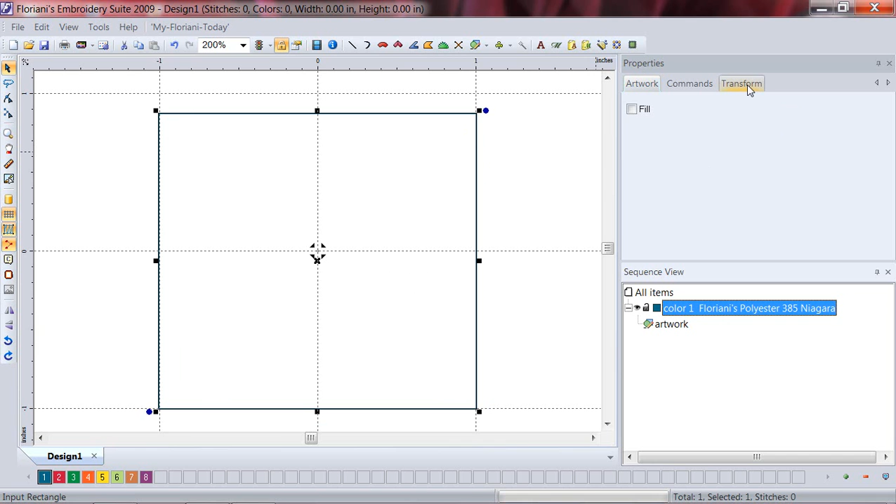Now I'm going to select this box. I can either left mouse click on color number 1 here - notice it has put selection handles all around my box. With that done, I'll come up to my properties. Now that I've selected it, it's added a transform tab. We're going to left mouse click on transform.

I'm going to come down here and deselect maintain aspect ratio, and then change the width to 5 inches and the height to 5 inches.

Now in today's exercise, the block we're creating is a block of fabric - we're going to do faux knitting, created with yarns. Your block size is only determined by the hoop size you own. So if you want to do a block of fabric that is 7 inches wide and 12 inches long, because your hoop will accommodate that, you can certainly do that. But for this exercise, we're going to work with a 5 by 5 inch block. It's something we can get through quickly in class, and those with smaller hoops will be accommodated as well.

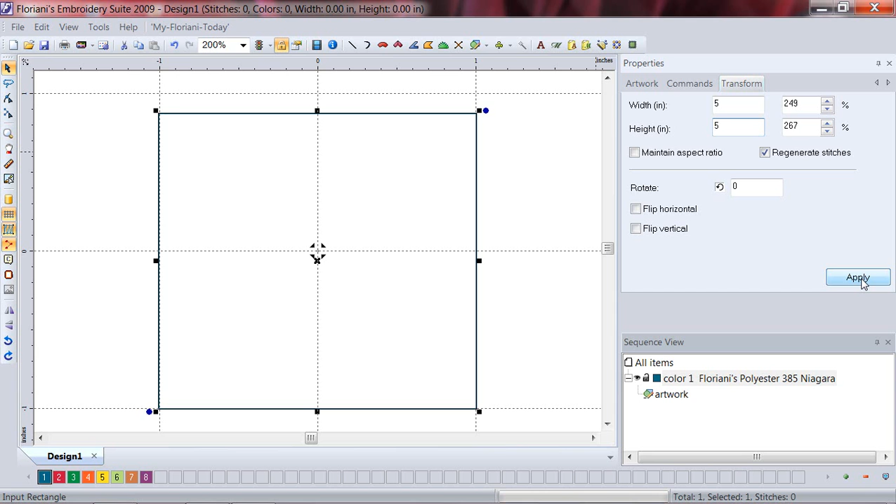So we are going to apply that. I'm going to come up to my zoom box on the top toolbar, left mouse click on the down arrow, and tell this to fit to screen. So you can see I have a 5 by 5 inch block here, and that is what we just created.

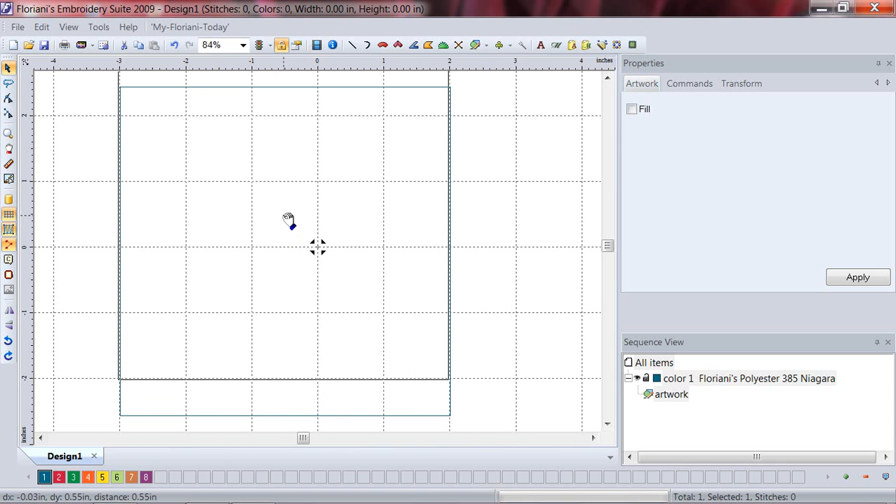Now, with this still selected, I want to move this box so that it actually lines up on grid lines, and you'll see why in just a moment. By holding down my control key and using my arrow keys on my keyboard, I can scoot this box over, and I can be very, very accurate because it's moving in small increments. I could also, of course, drag the box anywhere I wanted by holding down my left mouse key and holding onto this X in the middle.

I can move that box around. The reason I want to have it on grid lines is because we are going to use these lines to create our project. Now to do faux knitting, this is a Jenny Haskins new technique that I have seen at several of the shows.

They do it by sewing these grids on their sewing machines. I thought how nice if we could have it embroidered. It would take much less time and it would be more accurate.

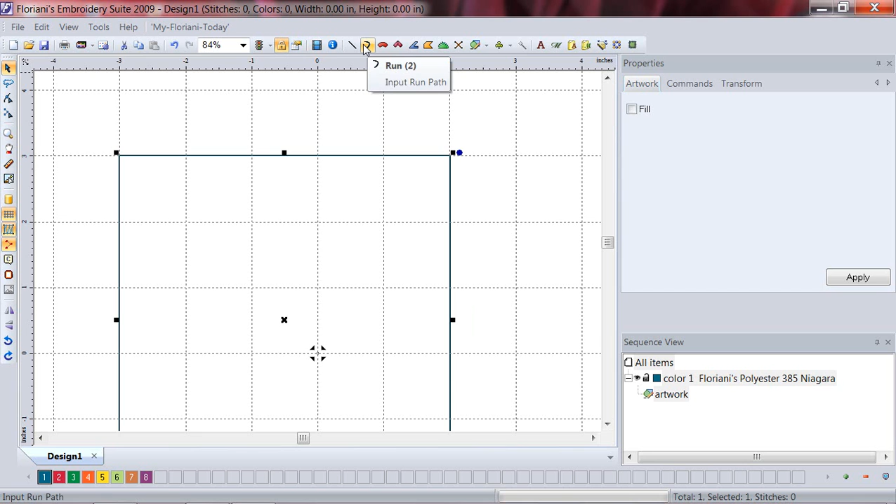So the first thing we're going to do here is grab your run tool. That is the little backwards black C on the top toolbar. Left mouse click on it, and notice the minute I select it, in my properties box everything came up. The first thing I want to do is change my stitch length to 3.5.

I am going to select a bean stitch, which is a triple stitch. And we will left mouse click on the word apply.

Now, depending upon the resolution on your computer screen, if you cannot see this apply button, chances are your sequence view box is above it, like that. So you'll come and put your mouse here until you see it turn into two parallel lines with arrows on it. Hold down your left mouse key, and while holding it down, drag your sequence view down a little bit so you can see your apply button and left mouse click on it.

Now with that applied, we are going to start our grid to hold down our yarn. So left mouse click on the upper left hand corner of your box, right on top of that blue line. Left mouse click, and it has put a stitch in.

Do you notice that? And the nice thing is since we put snap to grid, you notice even though I'm kind of moving my cursor up and down, it's hanging on to that line like grim death, because it's not going to allow me to go anywhere that doesn't snap on to the grid.

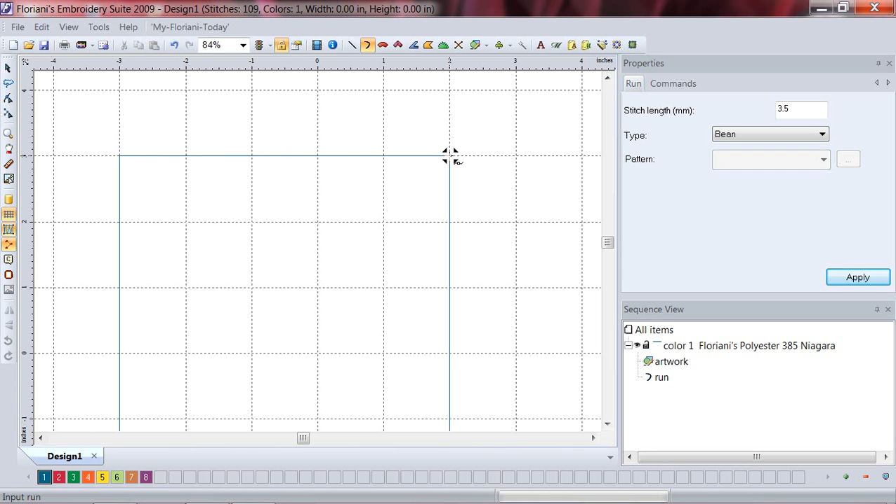Now if you go up to your top left hand tool on your left hand toolbar, that's your select tool. I want you to notice it highlighted it. I want you to look in your sequence view as well. Now we are using the same color at this point, R385 Niagara, if you have the Floriani thread palette checked.

The first thing I did was draw a piece of artwork. The next thing I did was create a run stitch. Now I want to change this run stitch to a different color.

We're going to come down to our color bar, and left mouse click on color number 2, then right mouse click on color number 2. Now you notice I have a blue square that's artwork, and I have a red line that is a run stitch. Now we've created that.

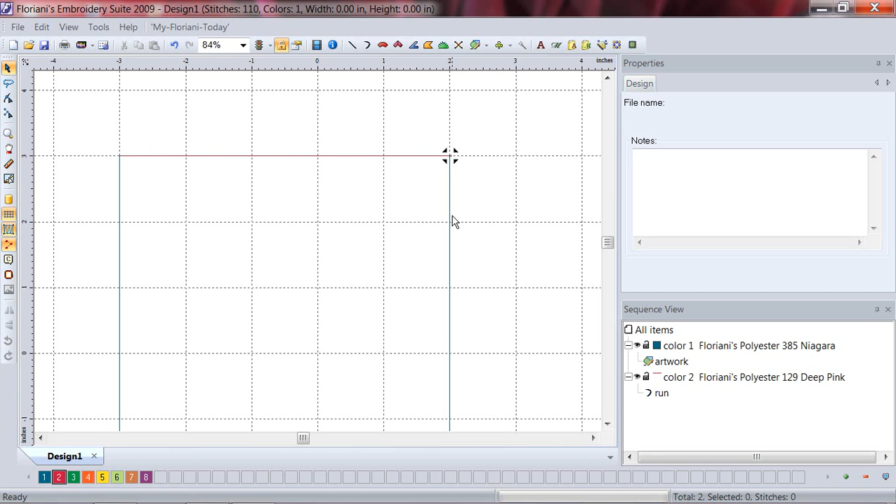So with the red, reselect the red so it will stay on our cursor now, and we're right mouse clicking on it. We ended our last line right here. We want to come straight down to start our next line with our run stitch.

Make sure your run stitch is selected. You're going to left mouse click here, and why we're doing it this way is think of how your machine is going to path this. We're going to go left to right. I don't want a huge jump stitch coming clear across and going back to the left again.

So I'm going to start this line on the right hand side. We're going to go clear across, and again at the end of the box we're going to left mouse click again. Now I have the two stitch ends. I will right mouse click.

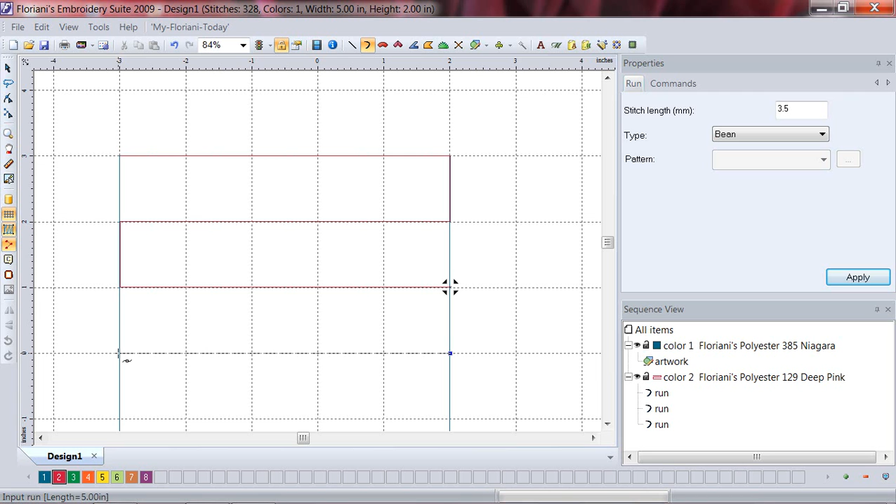Now I'm going to come straight down, left mouse click, come across, left mouse click, and right mouse click to create the line. Left mouse clicking puts in the points. Right mouse click enters the commands to create the line.

Right mouse click, and again we're just following our square down. Right mouse click, left mouse click here, come across, left mouse click at the end, and right mouse click. Now let me make sure I'm fit to screen so I can see all this.

You know where you ended, if you had to take a break or something, you can see that the cursor is at the last place you ended right here. So I'm going to left mouse click, and right mouse click. Now we are going to do our grid going vertically, and we're going to start right here where we ended.

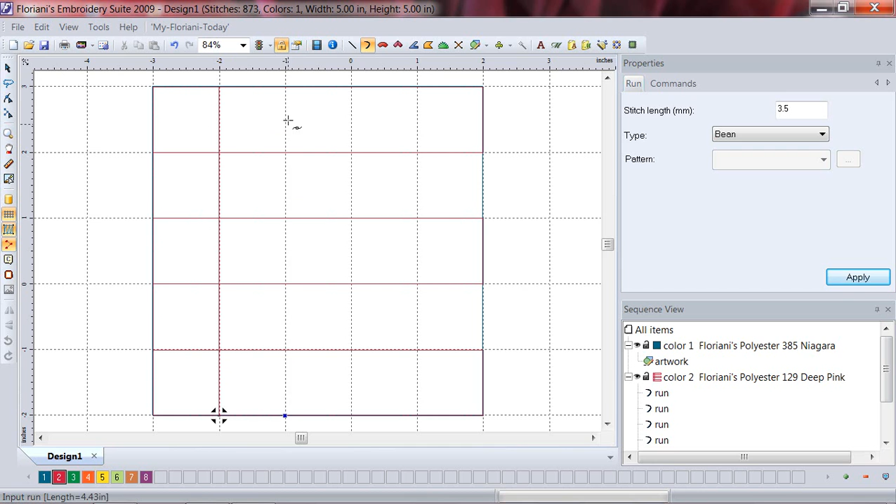We're going to left mouse click, come to the top, left mouse click, and right mouse click. Come over to the next line. Left, left, right, left, left, right, left mouse click, and right mouse click. I want you to left mouse click, right mouse click, and do not forget to do the last one. Left, left, and right. Now we have created our grid and we no longer need our placeholder, our blue box.

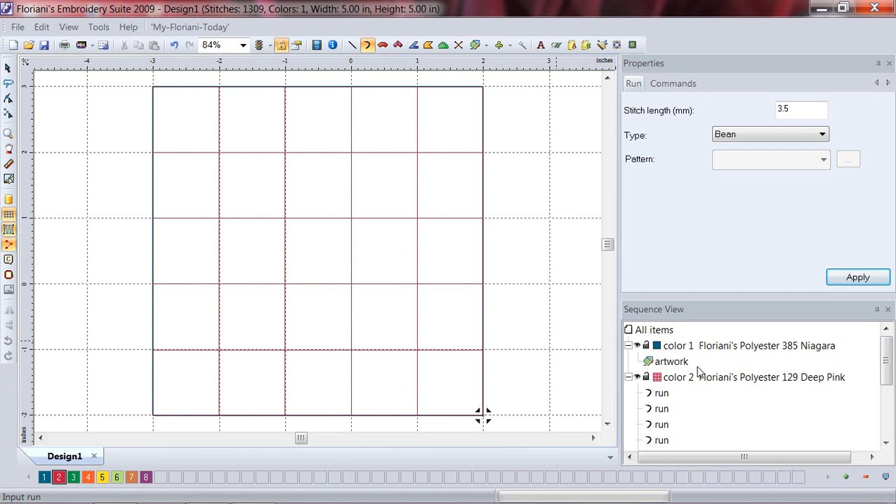So come over into your sequence view, left mouse click on the blue box, and I want you to now hit delete on your keyboard. I want you to notice it's gone. Now all we have is our red triple stitch grid.

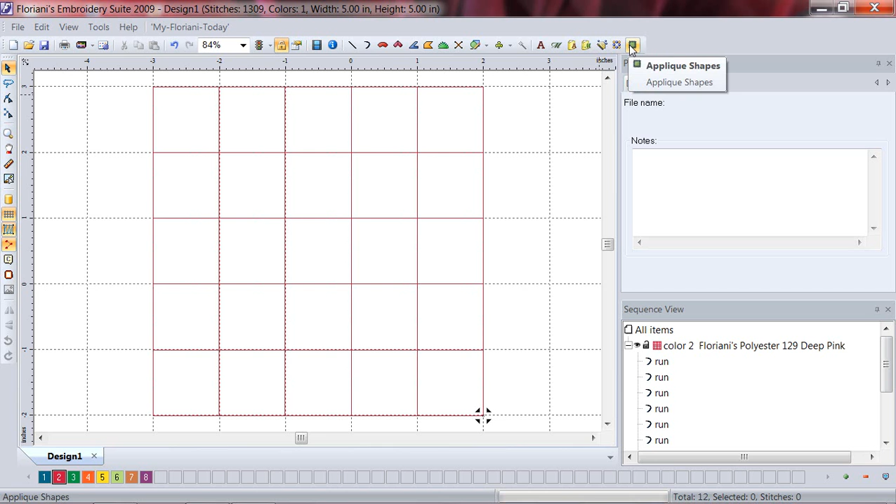Now we are doing, like I said, 5-inch squares of fabric. That's what we're going to create. Now we need to put something to also help hold the fabric together besides this grid system, so we are going to come into our motif shapes at the top right hand end of your toolbar. You've got, right before your applique shapes, right before that is motif shapes. I want you to left mouse click on that.

I want you to come down and select shape number 16. Left mouse click on it and it's going to automatically appear on our screen. Now I do not want it to have the motif running along it, so what I'm going to do is trick the software, because I want to use this shape as a run stitch, but it was actually created to be a motif stitch.

So with it selected, right mouse click on it, and you're going to see where it says convert to. Now notice it does not give me the run stitch option, it was created with a manual hand punching, so it does not give us the option of a run stitch. So we're going to trick it. We're going to come down, it gives us the manual stitch, but we don't want that. We want to actually define the exact length, all of our stitch lengths to be uniform.

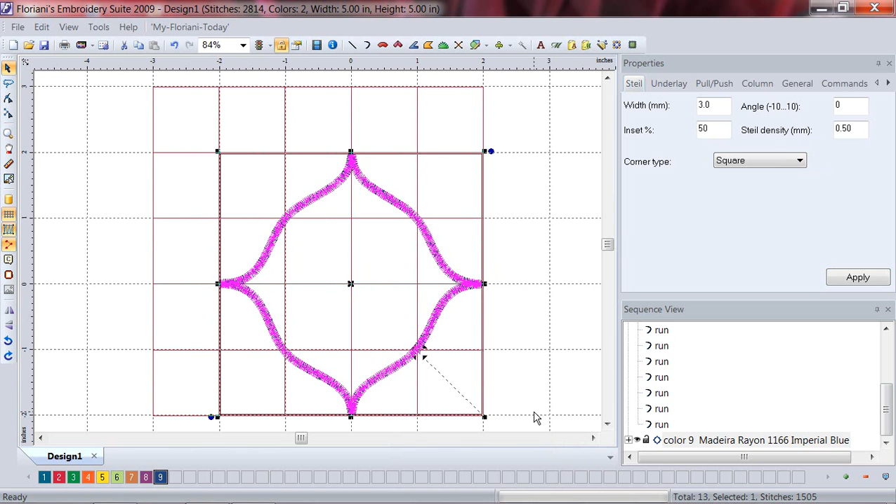So I want to come down to Steil. We're going to left mouse click on Steil, let it convert it to a Steil stitch. Now that it's no longer a motif, if I right mouse click on it, go to convert to, it gives me the option of a run stitch now, and that's what I want. So left mouse click on the word run.

Now I have a run stitch, and I've still got bean here selected and 3.5. I still want the stitch length to be 3.5, but I now want a 2-ply stitch. So left mouse click on 2-ply. Make sure you left mouse click on the word apply. So now I have applied that.

This is too large, so we're going to change the size of it. Come to the word transform, just like we did with our square. This time I want you to select maintain aspect ratio, because I want to just have to change one of these. I'm going to change the width to 1.5. We're still in inches, and you notice it changed the height accordingly, and we are going to apply that.

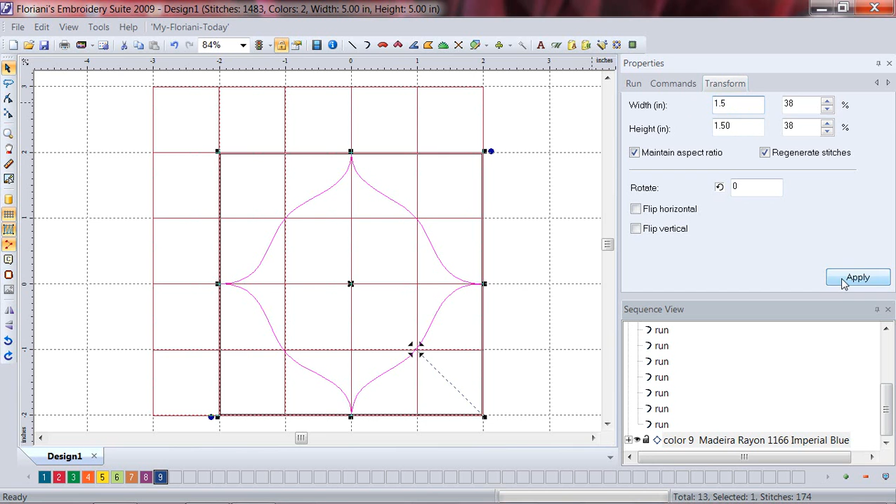With that applied, I want you to put your cursor on the center so it grabs the X, it turns into a little head. Hold down your left mouse key and just kind of bring it to the upper left hand corner.

Now we are going to sew several of these blocks together just like a quilt. And if you have seen Ginny's new book, Jenny Haskins, When Dreams Fly, that quilt, she's got a quilt, a coat pattern, several items in this book that are absolutely gorgeous. And you don't even notice until you look that the fabric was made out of yarn. It is absolutely stunning, so I recommend that book.

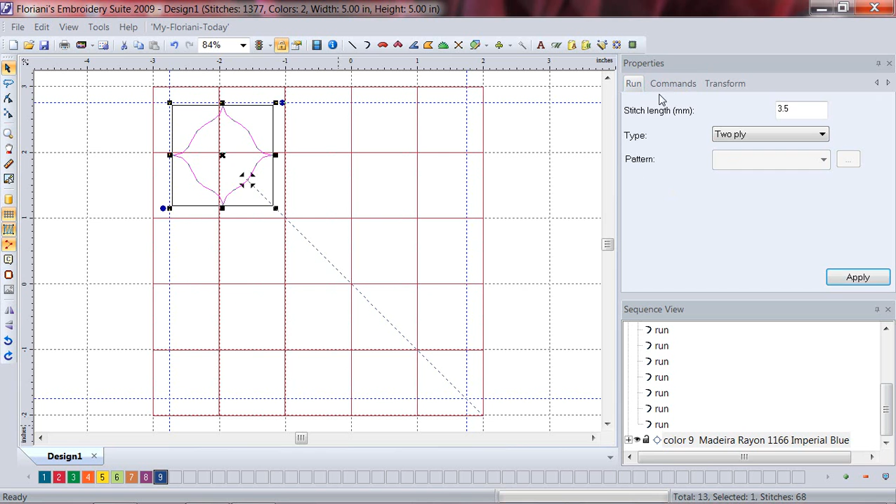So now that I have this placed perfectly, go to your properties box, and we're going to look at a new box we haven't dealt with previously. We're going to left mouse click on Commands. Now I want you to notice that it says tie in and tie off.

I want you for tie in to tell it to do a basic, tie off basic, and apply that. We want to make sure this ties off well, because it's going to cut the thread in between each motif, so we want a good tie off that won't pull loose.

Once I've done that, I now need to duplicate this. I need 3 rows of 3. I can do that one at a time, or I can come up to my tools bar.

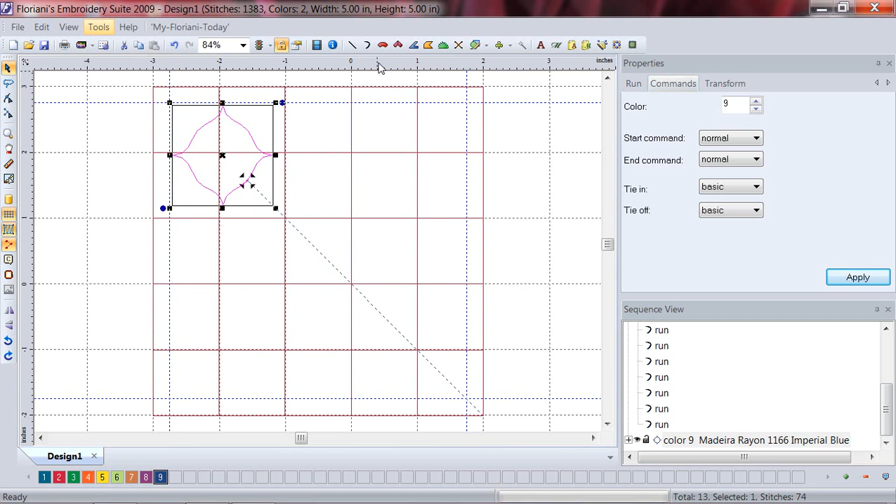Up at the top, you have File, Edit, View, Tools. Left mouse click on Tools. Oh, before I do that, I am going to change from inches to metric, and I'll show you why in just a second. Let's right mouse click here and change this to metric.

Now I want to go to my tools, left mouse click, and come down to Repeat. Left mouse click on the word repeat. Now you notice it's already set for 3 across and 3 down.

This is working in millimeters. If I had this in inches, I would have these things huge, because stitch length - our motifs are created with stitch lengths - and we always think of stitch length in metric. If you did this in inches, this thing would be much bigger than your square. So you always change to metric when you're going to do a repeat.

Now if I wanted distance - and you don't need to do this - if I wanted distance in between these two, I could look and set them apart.

So think if you're putting bookmarks in a frame or something and you want to stitch out as many as you can get in your hoop. But in this case, I don't want any distance in between them. I want them touching one another. So we have 3 across and 3 down just like I needed. And I'm going to say OK, and you will see that it has put those.

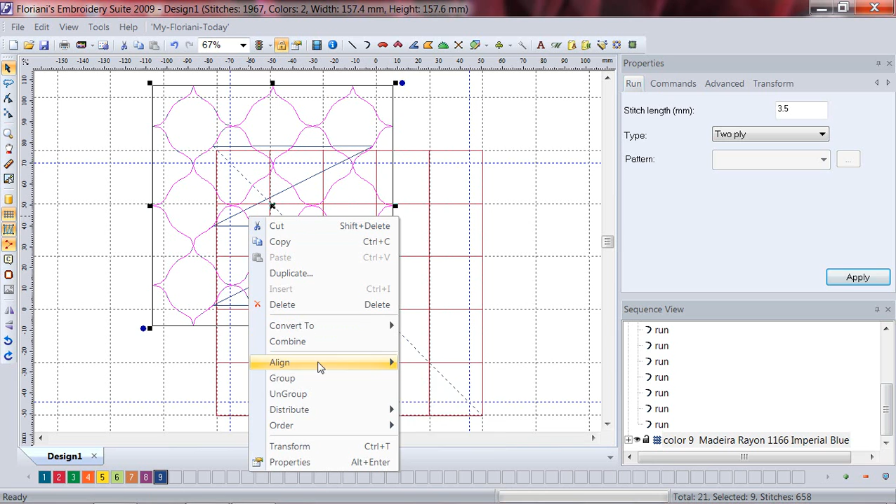Now I want you to right mouse click. With it selected, right mouse click on it, and come down and group them. That means your software now looks at this as one group of stitches.

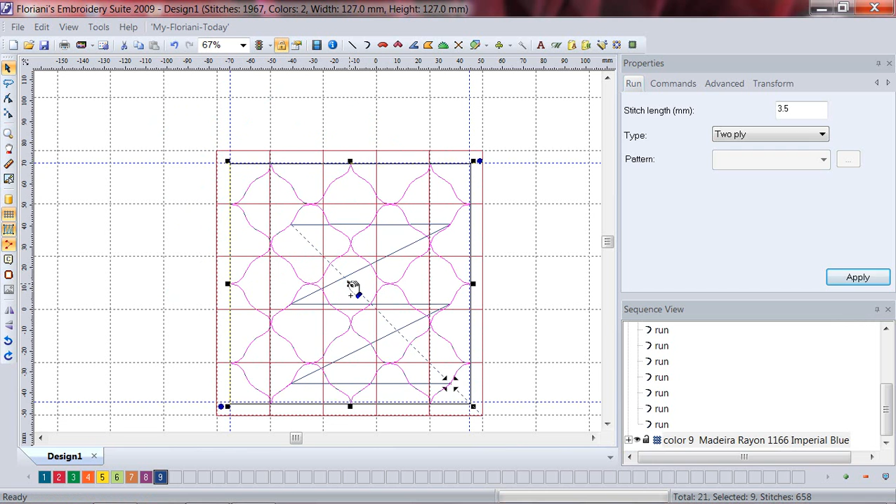I want you to grab your little X in the middle, left mouse click, and bring these down and place it right on those lines where we did it before. You can also use your control key if you think you need to nudge them up or down just a bit to fit within your blue lines. So you can see that now we have completed that motif over the whole of our square.

So what's going to happen is in the portion of this class where we do the construction, you're going to see how we lay the yarn out. Then it will be embroidered together as a piece of fabric using our triple stitch grid, and on top of that it will stitch our motifs down for extra stability. You could also add a design if you wanted to put a design on any of your squares, you could add that as well. But for today's lesson, we're just going to create the fabric right now.

So now my fabric is created. You can see it looks great, but I might want to change my colors. So the first thing I'm going to do is come into my sequence view, and you notice it's showing each stitch we created because I have a little minus sign here. If I want to not see each individual line I created, let's look at this. If I click on this run, you notice as I created these stitches, I'm using my down arrow to go through how I created this design, and you can see it will highlight it in the same manner that we created it. But we don't always want to look at all of this stuff.

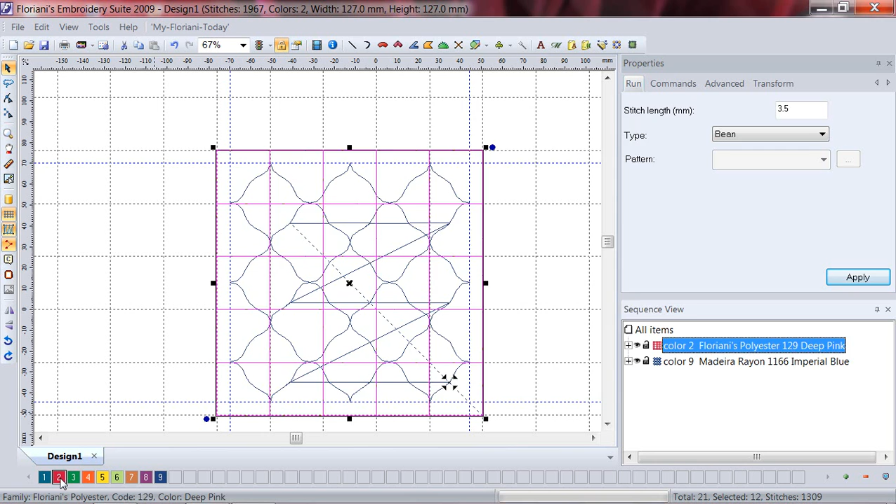I'm going to select color number 2 by left mouse clicking on it, and my thread palette will come up. I know the thread color I want to use is 125, which is a bright pink, and I'm going to left mouse click on OK, and I want you to notice it changed it here and here.

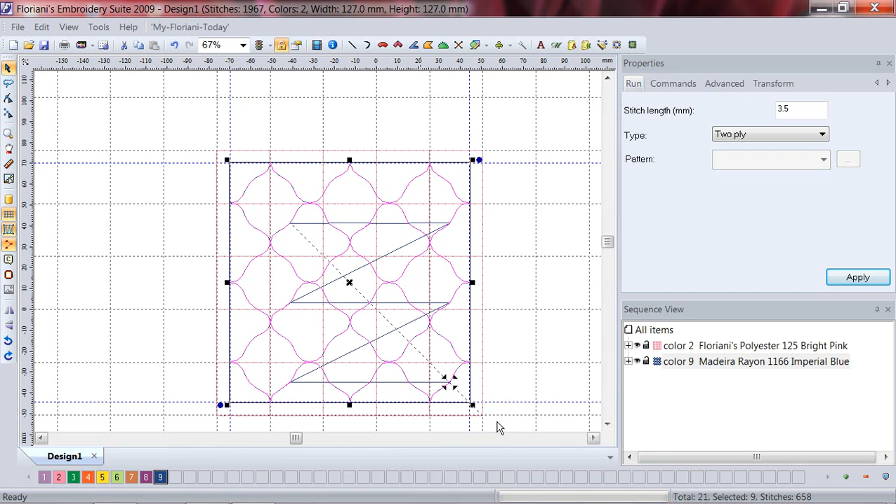I'm going to do the same with my blue, our motif shape. I'm going to left mouse click on color number 9, and I want to put in a light lavender color, though I don't remember the color number. We're going to use 624 for today, and I'm going to say OK. So you can see, well, it didn't change it. Why didn't it change it? I don't know. But now I have the pink grid and the lavender motifs.

We have completed this exercise, and we're going to go on to the construction portion of our class.

Now I want you to go to File, Save As. Then you're going to go ahead, and first I always recommend that you save it first in your Floriani, since this is our native format. Name it whatever you're going to name it. I've named mine Faux Knitting. And then you will save it there, and then come back again and save it into the format you need for your machine.